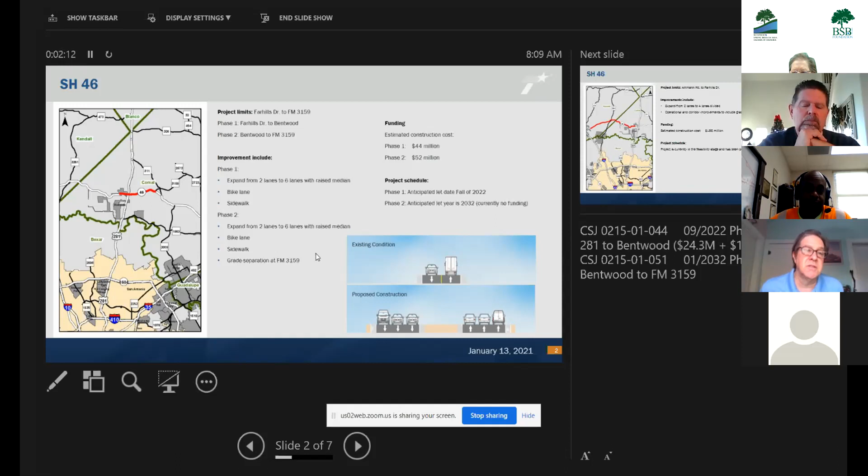This project is being done in 2 phases. We don't have that 96 million, we have about 44 million funded right now. So that's the Farhills to Bentwood section, which is really the heart of that area. And then the bookend is the section from Bentwood to FM 3159. We're expanding that roadway from a 2-lane section to a 6-lane section with a raised median, with bike lanes and sidewalks. In phase 2, it's a very similar roadway section, but we're looking at that grade separation at FM 3159. So under the phases, you have that 44 million for phase 1, which is programmed and funded right now. Phase 2 is at 52 million, which is unfunded.

Our anticipated let date, which is when we award it to the contractor, is fall of 2022. I always put seasons because I don't want to be too specific on months. Then from that date when it gets awarded to a contractor, it takes about 3 to 5 months to get folks on the ground, what we call boots on the ground. So that's the 46 project. I kind of heard somebody joke about how it's going to be messy and complicated. It will, but in the long run it's going to be a great project. Do I have any questions on that?

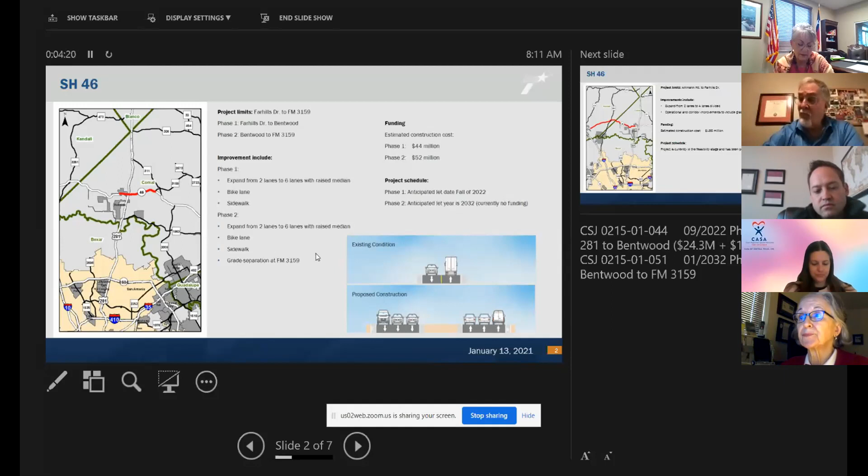Can everybody hear me? We can hear you. We hear you.

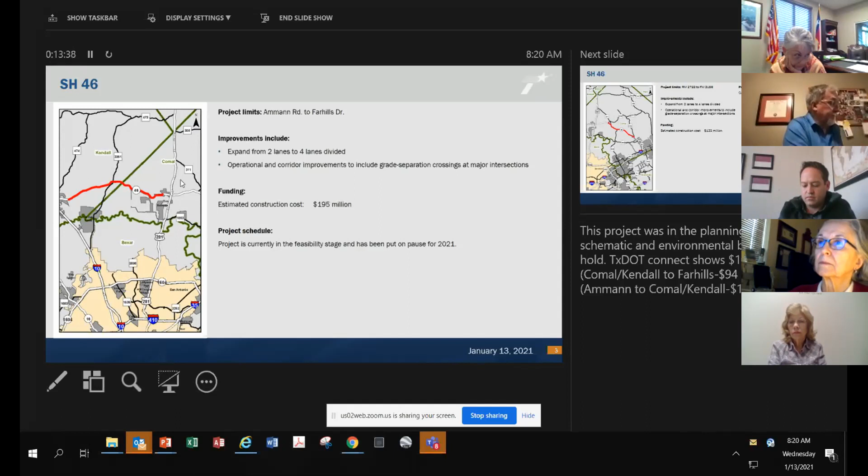Okay, and through all of this, there'll also be sidewalks, right? Yes, ma'am, there will be sidewalks throughout the corridor on both sides. What is the anticipated time frame for construction? If it starts in the fall of 2022, when do they anticipate phase 1 to be completed?

I'm going to make a wild guess on this. I'm guessing it's probably about a 3-year project it's going to take. Okay, maybe 2.5. I'm anticipating about a 3-year project.

Okay, Richard, how do you foresee the merging of those 6 lanes down to 2, or I guess it's 3 lanes down to 1, when you're going eastbound there at Bentwood? It sounds like we're going to be dealing with that for many, many years.

When it comes to that 6 lanes, I think we drop -- when you're going to Farhills, we drop 1 lane at Farhills, like a right turn lane off that 6 lane. Then that 2 lane carries through, and you merge it to 1. Going westbound, you drop the 3rd lane at Farhills, and continue the 2 going through, then they merge into 1. I can't remember, like 500 feet or 1,000 feet past Farhills to the west, then when you're coming in, it opens up to 2 lanes, and then boom, to that 3rd lane.

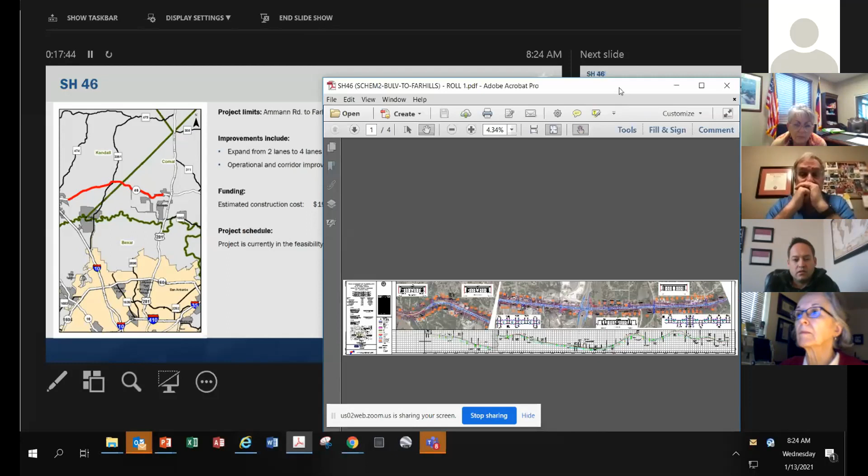I'm Heath Woods with Canyon Lake Water Service Company, and we've been working with TxDOT on this project for probably about a year and a half now. The plan is, like he said, they obtain the right of way, they clear, and then the utilities come in and relocate. That's all separate from the construction project that TxDOT does. Some utilities may do a joint bid, but most of us are doing separate, where they clear it, we go in and move our utilities, and then we're out of the way for the contractor to start construction.

So our schedule is we're going to be moving water lines probably within the next 2 months, starting that. And then we'll have all of our water lines moved by summertime, as our current schedule.

So they'll have to do the cut down of the road, the hills, before y'all do your water line move, right? No, and that's going to be a challenge for us in a couple of those areas where we're actually relocating farther out to get out of those cuts. But some of it, we're going to have to go extra deep with our lines. But yeah, we've got that all worked out, and it's going to work fine.

I think the schedule is we are going first, and then PEC and GBRA come after us. I think that's what the current schedule is.

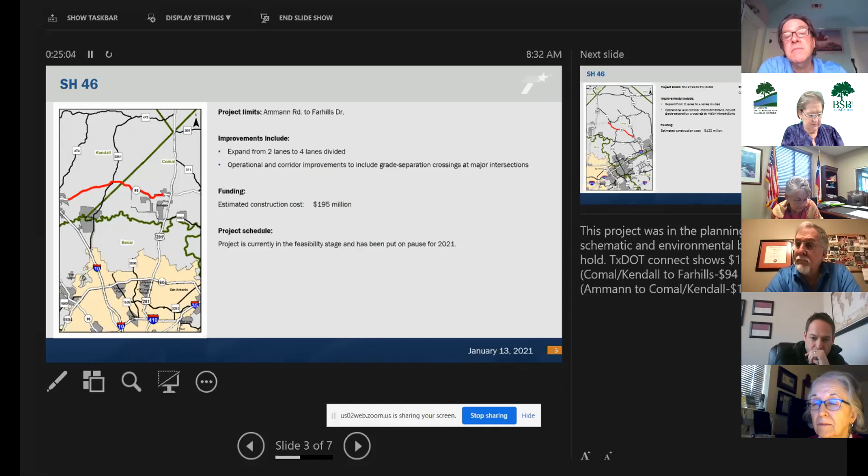It was very ironic, because where this historical structure or monument was, on the other side was a cemetery. Usually we just shift the road, but there was a cemetery on the other side. So what we did was cut out that section, to save time for the project we were just talking about. We knew at some time we'd come back to study all the way to Farhills again. With this bigger project, we have more time to work out those historical issues between Bulverde and Farhills. Okay, thank you.

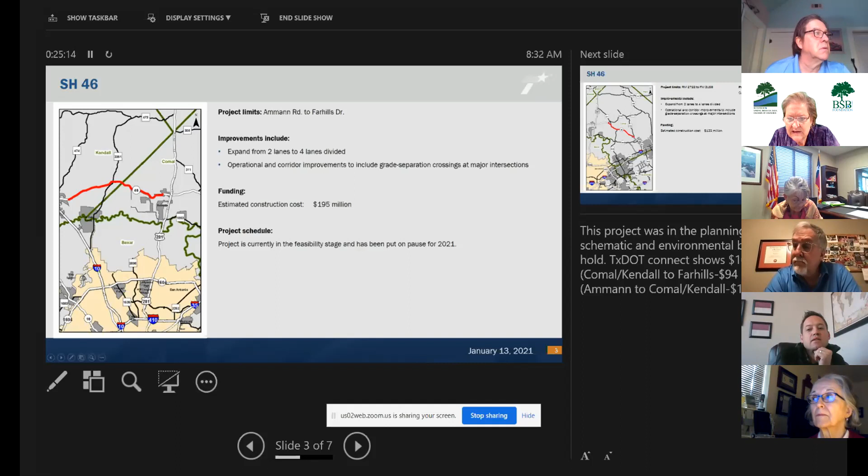Yes ma'am, alright let's go to the next one. Any questions? I don't see any other questions in the chat box at this time.

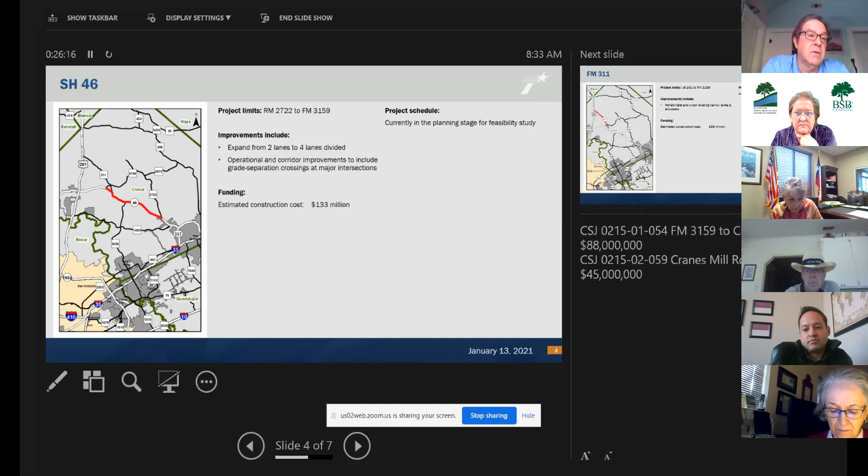This project has not been put on pause for 2021. We allocated some money to this consultant. When I say it has not been put on pause, it's been slowed down a little bit. We did provide our consultant some money to complete survey work. I think there were some concepts, but we did provide them some money to work on some concepts for this year, 2021.

We will probably not be having a meeting with affected property owners yet, and we don't know the right of way out there just yet. That'll probably come in 2022. But they were a little bit further along on this section of 46, so we said let's throw in some funds and have them keep working on this slowly.

Let me confirm something. The second phase of the 46 project that comes through Bulverde did include 3159 with a grade separation at Smithson Valley Road, is that correct? Yes ma'am, that's the second phase of that first 46 project.

So this would just go up to where 3159 connects. We have to have termination points for these projects. So 3159 is the logical termination, but obviously that 3159 grade separation will carry it past, and that's where this project will tie into. Okay, thank you.

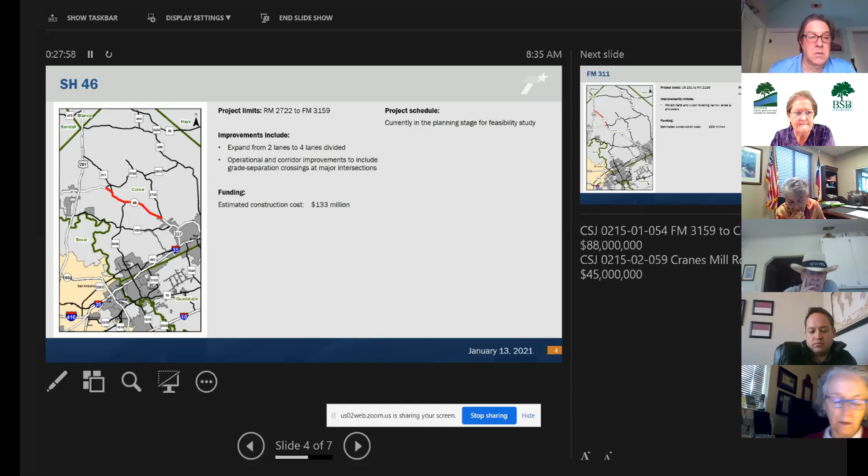This is a project I was made aware of maybe a month ago. This is FM 311 from 281 to 3159. It's a rehab and widen of existing narrow lanes and shoulders. This is funded, with an estimated construction cost of $26 million, and an anticipated let of fall 2025.

We haven't started schematic, we haven't started anything for this. But if you're all aware, there are some very narrow stretches of roadway out here. I wanted to bring this up because we may have to do a schematic, because we could possibly need right-of-way out here. We might have to look at the roadway section to see if we can get design exceptions just to widen it and add shoulders, because there are a lot of embankments and drops in that area. So I just wanted to let people know this is an area we're trying not to acquire right-of-way in, but we may have to.

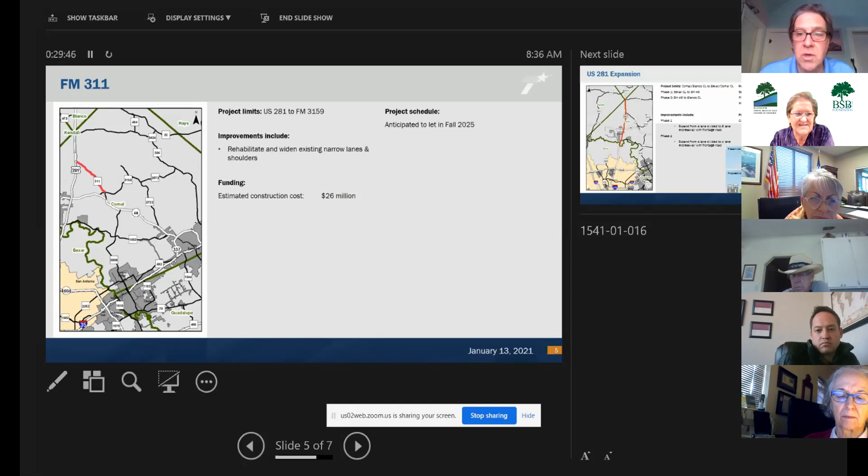Okay, now the biggie. I anticipate a lot of questions on this one. This is our favorite corridor in the whole wide world, number one, the lifeline for the hill country.

So if you all are aware, there is our big construction project from 1604 to the county line. That's currently under construction, and I think it's completing, I tried to text the area office, but it should be completing in the next couple of years.

But this is so we anticipated, look, Comal County has this huge growth, probably in the top 10 counties in the country for growth. We're looking at this 281 corridor, so we decided to get a consultant on board to look at the entire corridor from county line to county line.

So this is kind of our phasing that we're looking at: the Bexar County section, which we consider phase one, is from the Bexar County line to State Highway 46. Then from 46 to Blanco County line, traffic drops a little bit, so that's why we put that in phase two. From 46 to Bexar County line, you all are probably experiencing a lot of that.

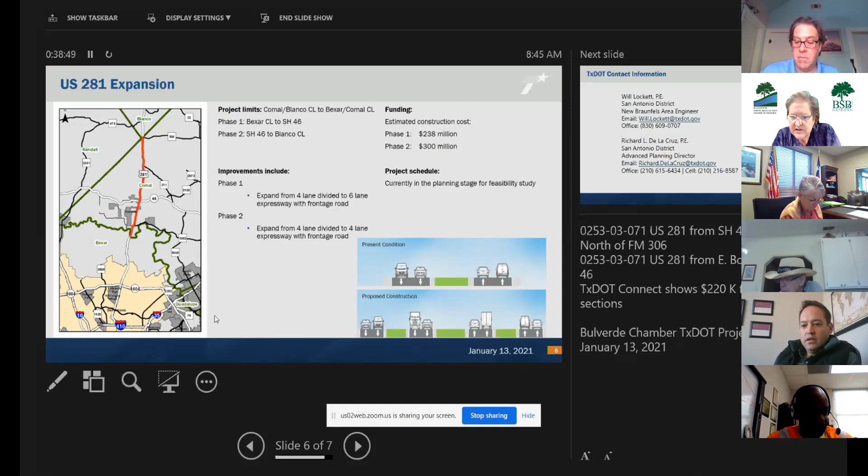All right, so there's the contact information. Any other general questions for either Richard or Will?

However, Comal County has had interest in us looking at the Sattler area, that Horseshoe area of the river. There's a lot of pedestrian traffic during the summertime, and a lot of congestion now getting out there to Canyon Lake. So we're looking at that small section to maybe add some pedestrian bridges and do a little widening. We do have a consultant on board for that small section in Sattler, but the larger FM 306 project is kind of put on pause for now.

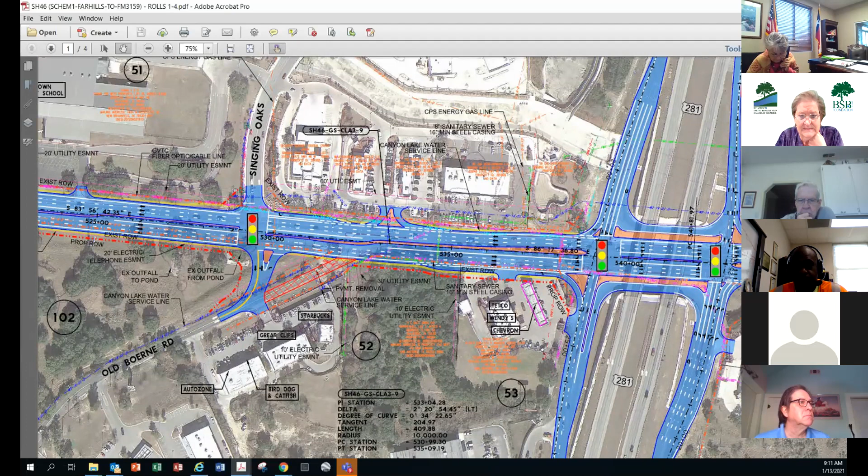All right guys, that light will make a big difference, and it will be a nice addition there. I wanted to go to Stahl, I know there were some questions on that. See, this is Stahl and Riverway, so this is the improvement we're doing there.

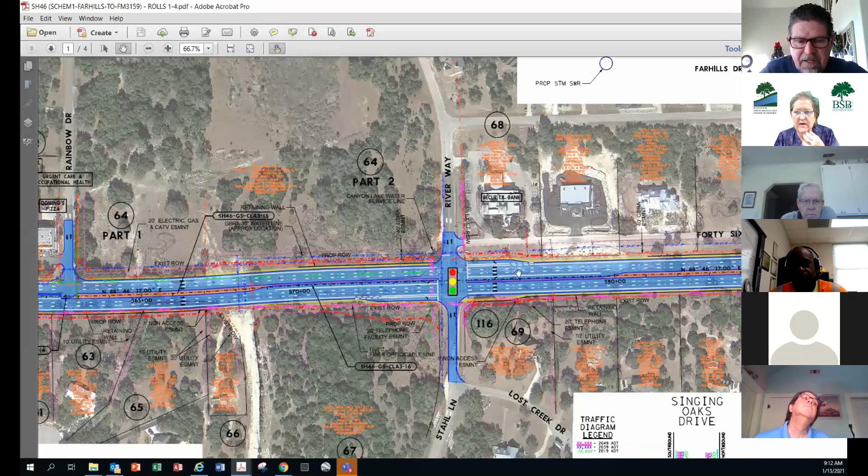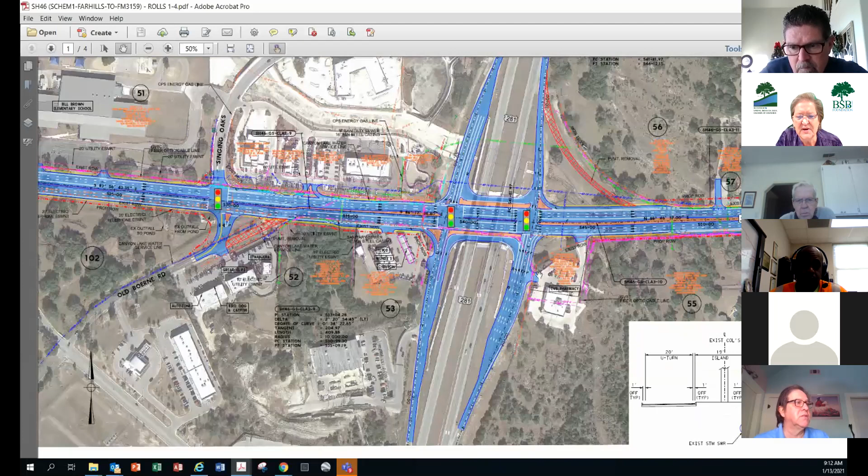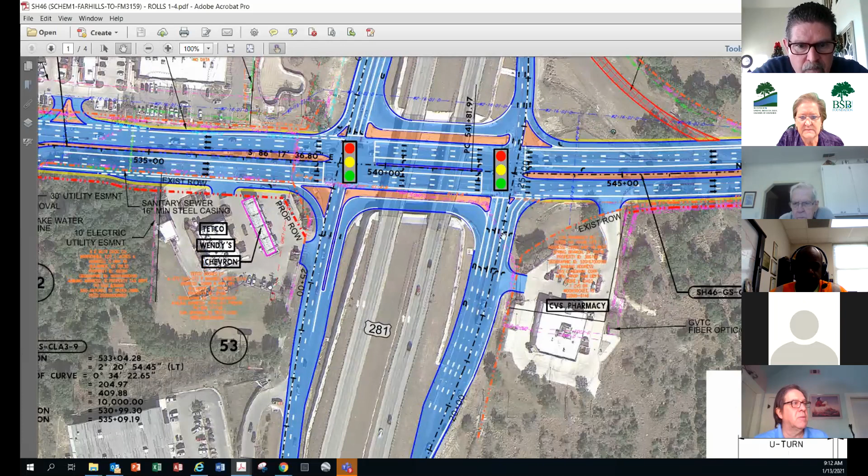Yeah, that's what I was trying to point out, 281, I'm sorry, that intersection. These are the improvements we're doing, the ramp improvements, and you can see the major improvement we're doing here, just all the improvements going on here. Yeah, that does look great, around the area as far as roadways, construction, and all that stuff.

So over here, currently you have that big sweep going north off of 46 onto 281. Is that going to be closed, that lane marked in red that kind of veers around there? Yes, you'll actually have to go to the light or the intersection to turn north now. We're putting a right turn lane in here, pretty long, about 550 feet, so we're putting that right turn lane in and the sweeping lane is going away. It's not ideal to have these sweeping rights when we come to these major intersections.

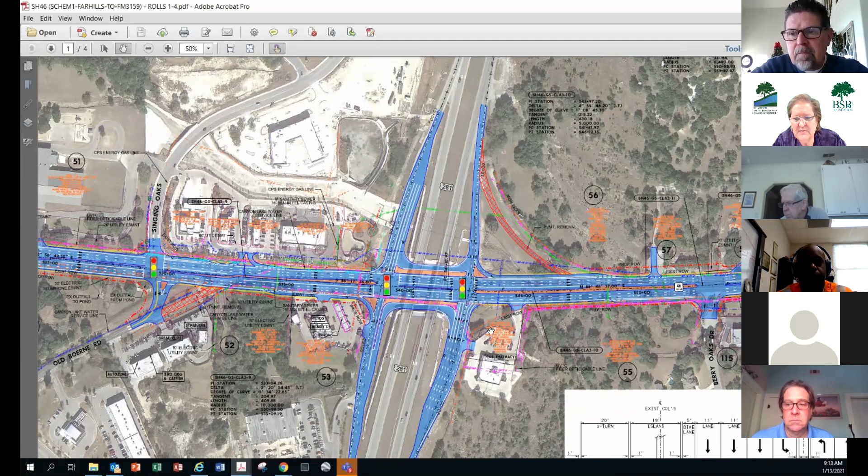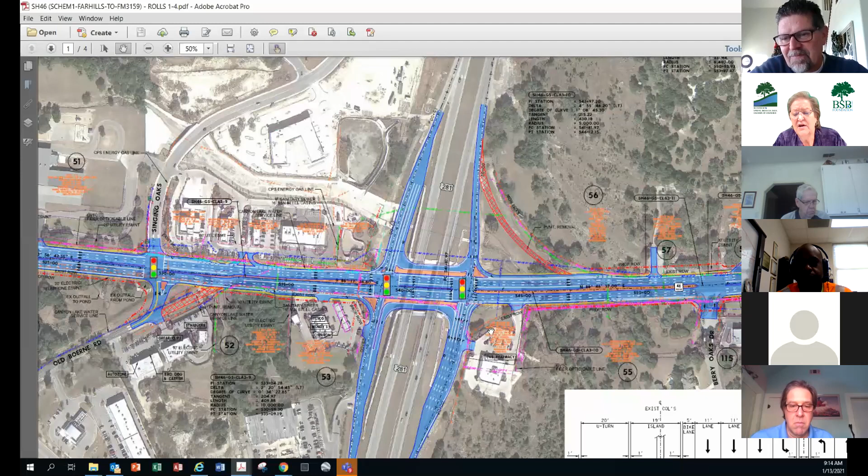I'm going to put you and Richard on notice. Prior to construction starting, I know the chamber will probably be calling on y'all to hopefully host an in-person town hall meeting, especially for all the businesses that will be affected by the construction, so they can meet and greet, get to know the people working on it, and know how they can contact y'all if they have issues or questions. So thank you very much.

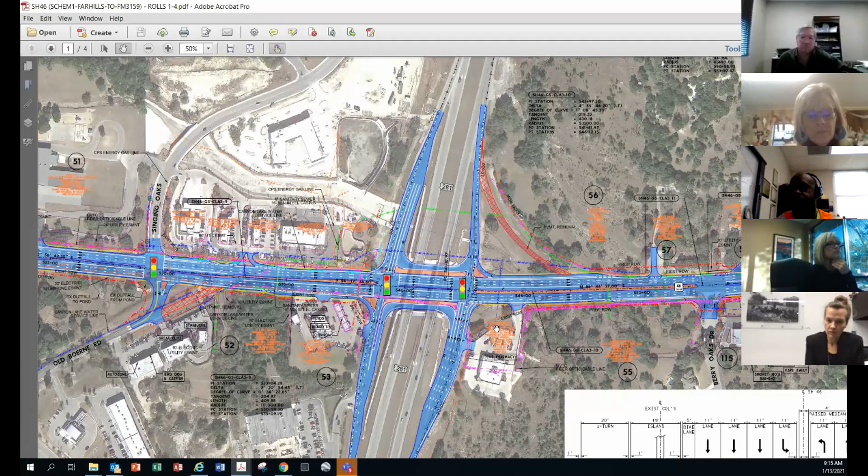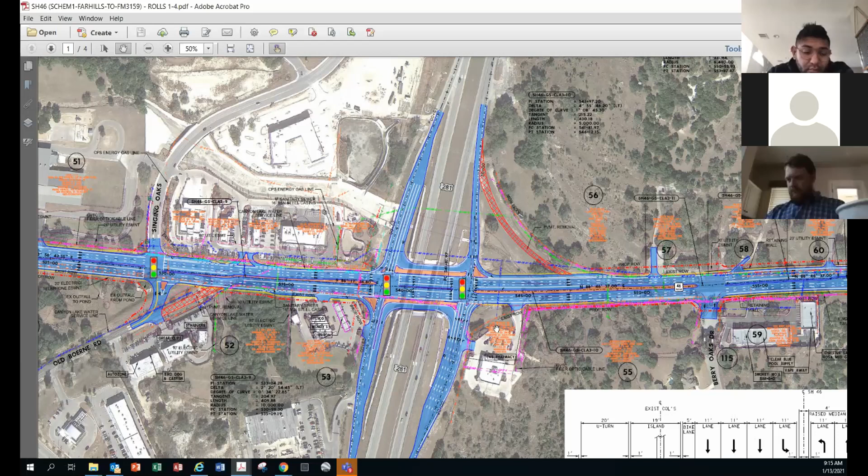Real quick, I wanted to point out that the demo work happening right now, the tree removal, is really under our right-of-way office. I don't oversee that office, but I work with them. I know a lot of people call Will, and you can continue to, but you can also contact me if you have concerns about the demo. We've been receiving some calls on that, and we've been scolding the demo contractor, saying keep it clean, keep it professional out there, because people have been complaining, and we're trying to respect the business owners' wishes to keep it looking good. We had weekly meetings with them to check in on progress. They need to keep the area office, Will, informed of what areas they're clearing out, so Will's not blindsided by it. So just an FYI that we've been trying to get after the demo contractor to keep things moving but keep it clean out there.

Will, that was $20 well spent, wasn't it? Yes, it was.

No, the point Richard brings up is really valid. The right-of-way clearing and demo work is not administered out of my office, but feel free to call me with questions. Usually if I get a question on the demo or right-of-way, the first person I email is Richard, and he gets the answer back to y'all as quick as possible. The complaints and concerns have gone down since we started meeting weekly with the contractor, and I believe from the last meeting we're really close to wrapping up all the right-of-way work along this section of State Highway 46, so it's much improved.

Thank you. I can't believe we didn't think to ask this earlier. The Chevron station on the southwest corner of 46 and 281 - my understanding is, you're zooming in - they're having to relocate their gas pumps a little further south because of the right-of-way acquisition, and they're going to move the building a little further south also. Is that correct?

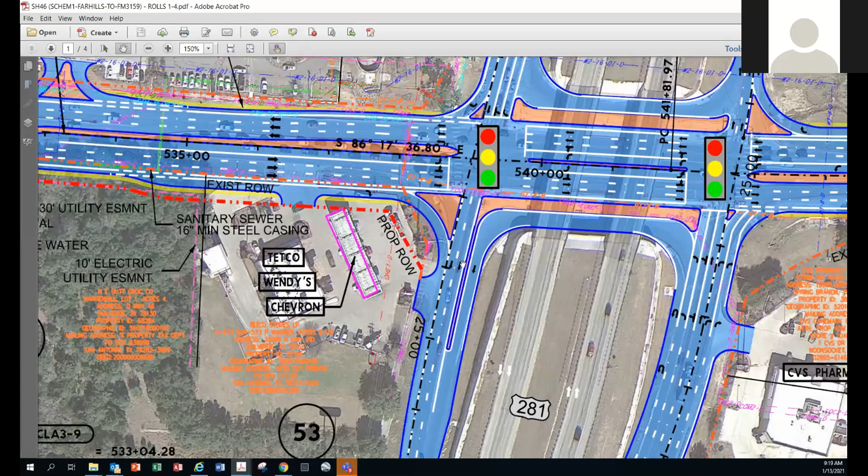Being a business owner in Bexar County on the Highway 281 expansion, y'all have been very good at keeping the work areas clean and organized, and she thanks you for that - pass it on to the contractors working up there that they've been very good to their businesses along the way. Yeah, I appreciate that comment. I'll let the North Bexar area office know, because I know that's been an issue out there a lot. I have received, believe it or not, nothing but compliments on how the construction is going out there. It is rocking, man. It's unbelievable what they've been doing.

We would really love to see that on our 46 expansion.

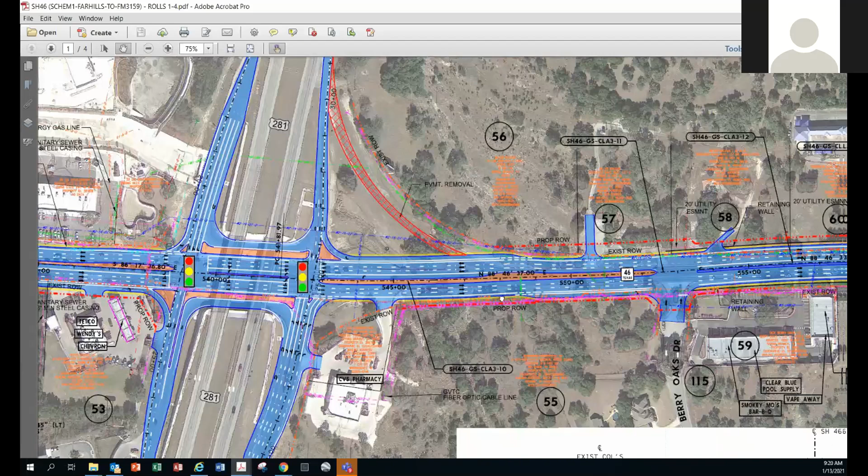Richard, can you move the schematic you have up over to where we can see, move it to the right so we can see the Creekside - nope, the other direction, I'm sorry - the Creekside interchange. It would be past Bulverde Crossing, one more, right there. So, Creekside Parkway.

Yeah, I remember us working with the folks in Creekside. At first we had a raised median, but they convinced us to allow an opportunity for them to be able to turn left in. There was also a left-in at this location too, so it's not a full median opening, but it does allow lefts, kind of concurrent. I think this was a great compromise between these two traffic signals.

So there's no light there, but they would be able to pull out and turn left. On Creekside, they can turn right, but they won't be able to turn left out, only left in. They'll have to turn right, go to the light, and make a U-turn. With a 6-lane roadway, or 3 lanes on this side, it's a little bit easier to make that U-turn.

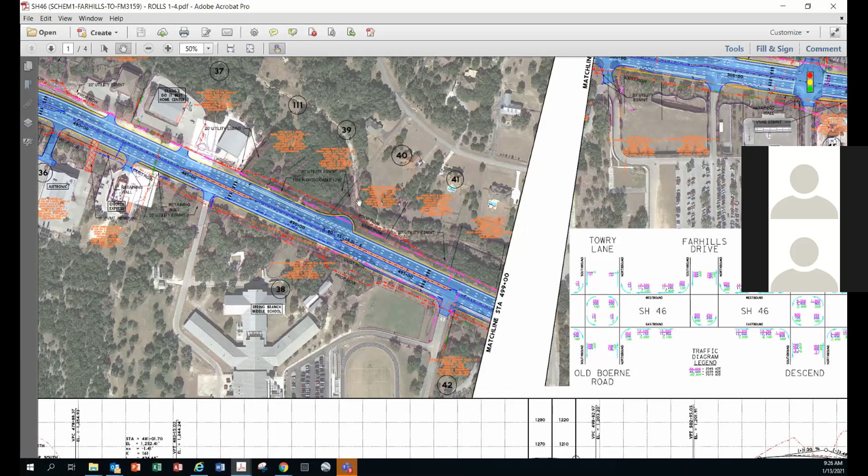For the middle school, we worked with them on this, and this is what I was talking about for their main entrance - we allowed a left-in only. This is what they wanted; they did not want any cross traffic through here, so we worked with them with a left-in only. Parents would drop off, come back around, take a right, and then make a U-turn. For their bus traffic, this is where the majority comes in, takes a right, goes to pick up, and then if they need to go westbound, they would take a right, get into this left turn lane, and do this U-turn. We built that for them, and this is designed for buses. So this is kind of what we worked out with the middle school and the ISD for that area.

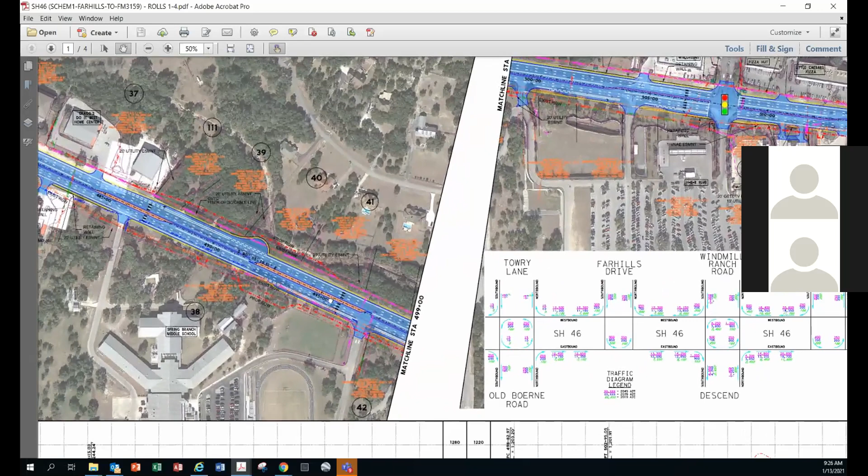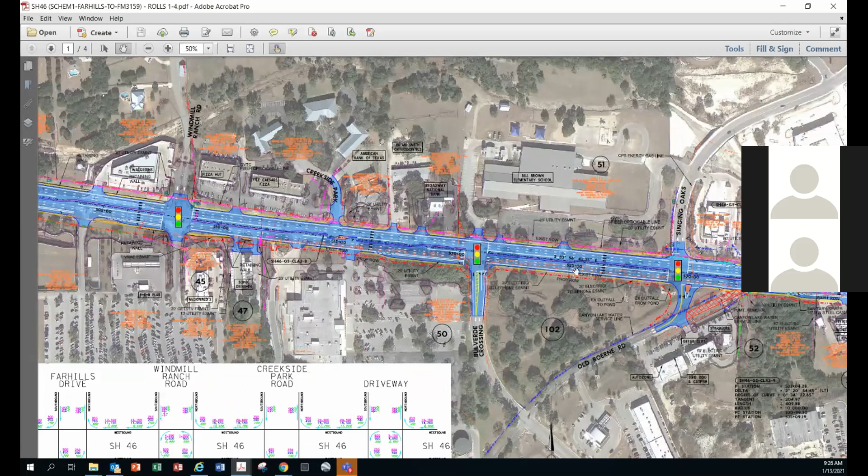Very good. And then the elementary school has a signal at this location. Well, their traffic actually comes in mostly off of Singing Oaks over here, but at this point a lot of times the traffic backs up through Singing Oaks. The buses come out there at the traffic light, so that gives the buses a good travel lane.

I'm going to put you all on the spot. Has anybody heard about this elementary school relocating? Because that's kind of a rumor we've heard — prime commercial property here, it's been for sale. Sally, I saw you're still on the call, if you want to chime in if you know anything about it, but it's been for sale for, gosh, over 10 or 12 years.

At this time, I have not heard that it's relocating. Some of their problems were resolved with Singing Hills connecting them to their wastewater treatment plant, allowing them to move the kids to the back versus having them up in the front playing near the road. But Kelly's saying that, to her knowledge, there's no plans to relocate Bill Brown at this time.

Okay, rumor, kind of like those rumors you hear from TxDOT. We've heard that too.

We have. I was at Broadway for years, and at one point we got real excited because if somebody did buy it, there was an option to buy it at one point. We were ready to get light access so our customers could come out at the light instead of trying to cut across on Highway 46, but that fell through. Anyway, at this time, once they got the wastewater treatment plant connection and the other improvements that Singing Hills assisted them with for traffic flow in the front, I believe they're situated there for a while.